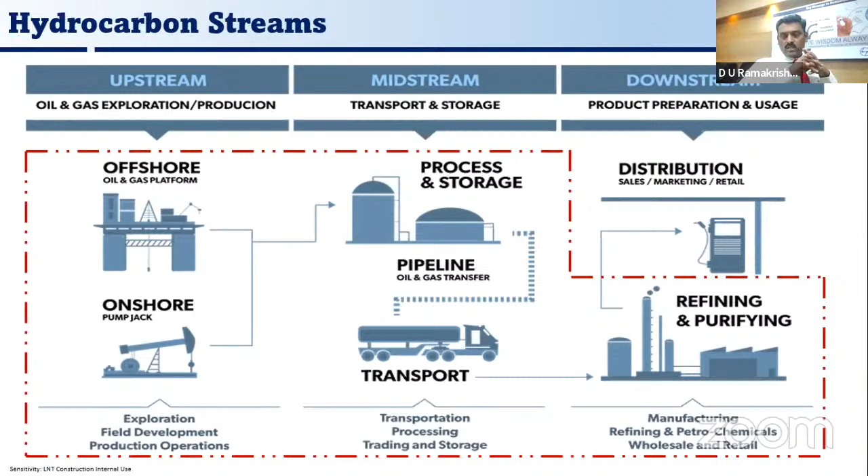If you see the Indian hydrocarbon sector, it is one of India's 8 core businesses. Hydrocarbon is following, and we are the third largest consumer of crude oil, with consumption of around 204 million metric tons per annum. We are also the 4th largest - India has refining capacity of 251 million metric tons per annum through 23 refineries, covered through public, private, and joint ventures. The main point to note here is that we are the 4th largest LNG importer.

In the next 5 years, we are going to invest around 7.5 trillion rupees in the oil and gas sector. The refining capacity of India, if you see it in 1998, was 62. Right now we are landing up to 251 MMT, that is million metric tons per annum. In the last 20 years, our refining capacity has increased by 125%, from 112 to 251.

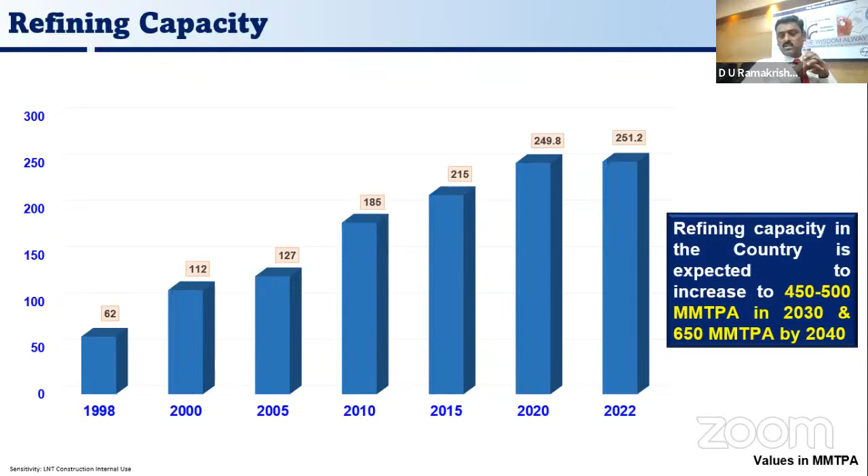The most important point to note is that the next 10 years, what we are going to do is what we did in the last 20 years - that's what we are going to do in the next 10 years. This clearly shows the largest volume we are going to handle in the hydrocarbon sector, and how many projects are going to come.

The main challenges in this field: one is the volume. Another is that customers nowadays are asking for reduced project cycle time - they want their return on investment as early as possible. The third is high competitiveness. Around 5 years ago, only 3 or 4 major contractors existed in hydrocarbon, but now multiple contractors, including foreign contractors, are coming into India and doing the job - it's highly competitive. Apart from all this, we are facing a scarcity of highly skilled technicians. These are the challenges in hydrocarbon.

With all these challenges, how we are going to ensure a qualitative product in the Indian industry is the main thing we are going to discuss now.

The key success factor lies on two parts: first, the process quality, and second, the product quality. If the process is in place and well established, automatically your finished product will come as per the requirements.

When it comes to process quality, it is very essential for an organization to have a strong, dynamic and robust quality management system. It means there should be a strong vision, mission, and a true quality policy stating what our requirements are in order to achieve our target.

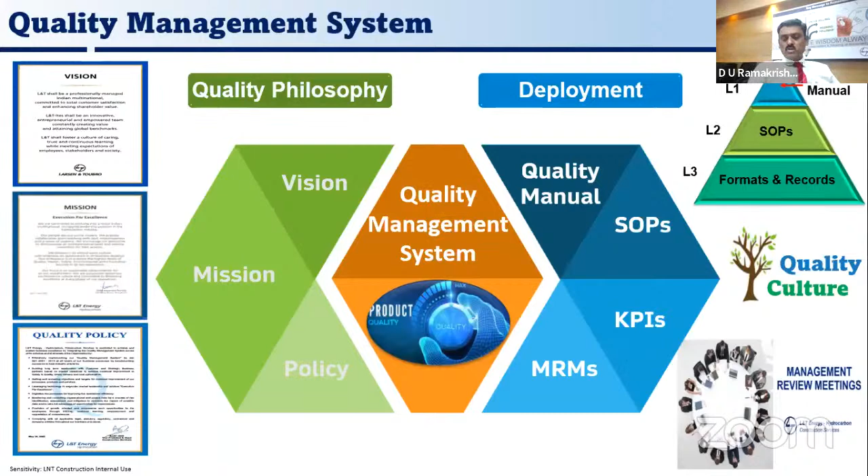As Mr. Pradhan mentioned earlier, in any project, since it is an EPC - engineering, procurement, and finally construction - there should be strong detailed engineering.

We should have a strong understanding of the customer specification. Even though I've shown the various processes involved in design, I'm going to specifically talk about 3 phases that form the qualitative design. Quality doesn't only lie with the end product - it should be present at the design stage also. The first point is we should have a very clear understanding of customer specifications.

We should not go by default. Some projects we have done earlier, and when we do a similar next project, it doesn't mean the earlier specification can simply be copied. We should understand that it varies depending upon the licensor.

The second thing is interface engineering, which refers to engineering, procurement, and construction. There should be strong project feasibility studies and constructability review.

Sometimes design people sit inside the office and design with respect to specification, codes, standards and statutory requirements. But practically it may not be possible to procure that particular item, or construction may not be in a position to build as per their design. This leads to issues by the end of the project, or there may be some compromise on quality.

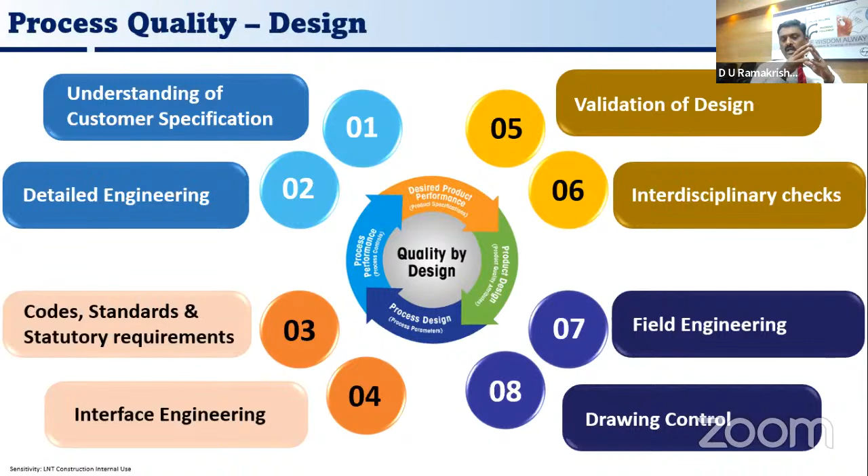In some projects, the revised drawing could have been made in the month of May, but the end user will still use the superseded drawing. So there should be a strong drawing control. It needs to be ensured that as and when the revised drawing has been made, it is properly communicated to the end user. These are the main points to be taken care of at the design stage.

When it comes to the second part of process quality, meaning procurement, we should have strong vendor management, evaluating the capabilities of the vendor. We should not go based on L1.

We should have a strong evaluation system where the capabilities of the vendors, with respect to financial capabilities, resources, whether we can meet the delivery schedule, what type of quality requirements are needed, and whether the vendor has proper resources in terms of machinery and materials, are evaluated. This needs to be evaluated periodically, not on a one-time basis.

The second thrust in procurement is that any material request made by design should be validated by quality before placing the order itself, to ensure all quality requirements of the specifications are put forth before the order is placed with the vendor. Otherwise, ambiguities may arise at a later stage, which will cost not only quality but also the progress schedule.

When it comes to order management, we are well versed with the quality assurance plan, and periodic inspections are carried out with competent third-party inspectors. But here I'd like to make two points. Normally the mistake that happens is people think that once stage inspections are made, the finished products are okay as per relevant testing.

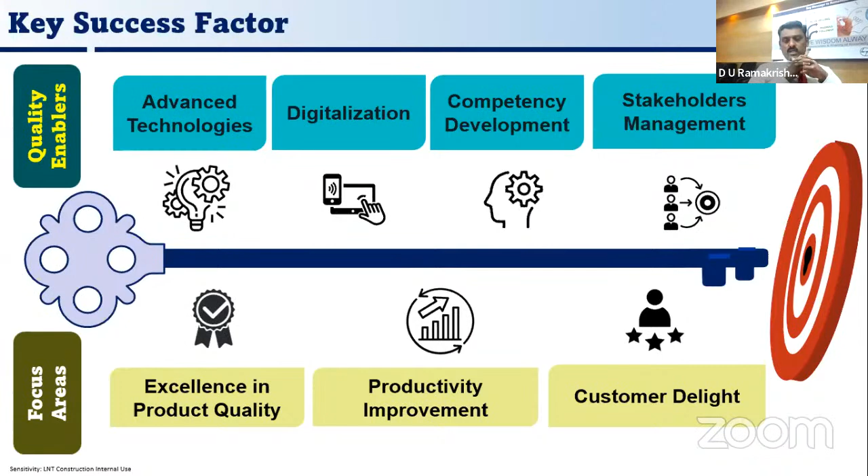Now let me talk about product quality. In the next 10 years we are going to handle a huge volume of projects, and cycle time is getting reduced. Unless we focus on quality enablers - advanced technologies, digitalization, competency development, and stakeholders - these are the 4 areas we have to give more focus to, so as to get excellence in product quality, improve our productivity, and ultimately achieve customer delight.

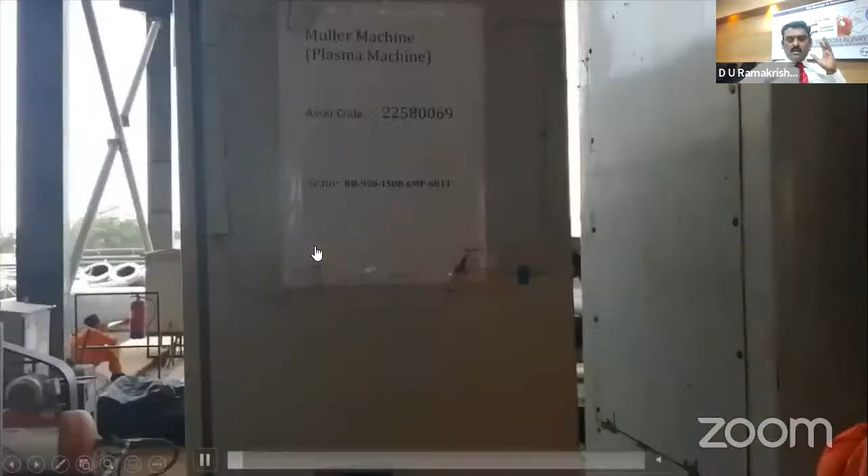Now, a few of the technologies available in the market which are essential for the growth of the hydrocarbon sector, I'm going to discuss here with some videos. When it comes to cutting operations, CNC cutting machines are available in the market. In the conventional process, we normally used gas cutting followed by grinding carried out with a grinder.

CNC machines are being made available where cutting and beveling will be simultaneously carried out. The productivity of these machines can achieve around 400 inches as compared to the conventional manual process, which gets around 60 inches. So you can see it is almost 7 to 8 times higher productivity.

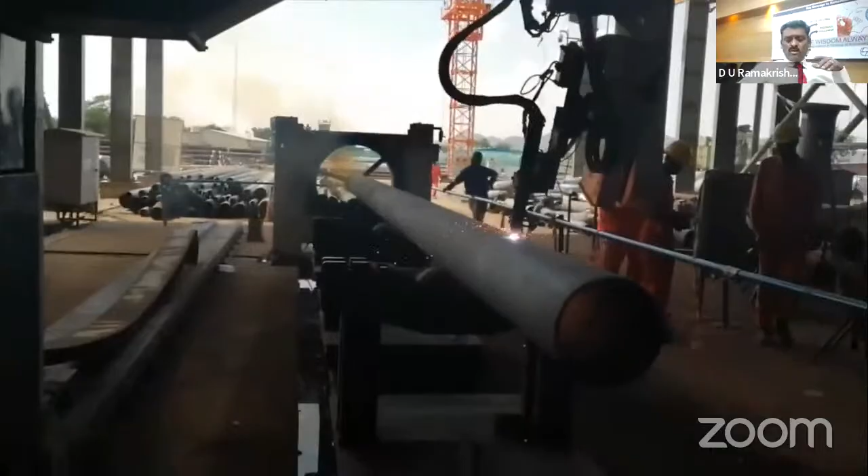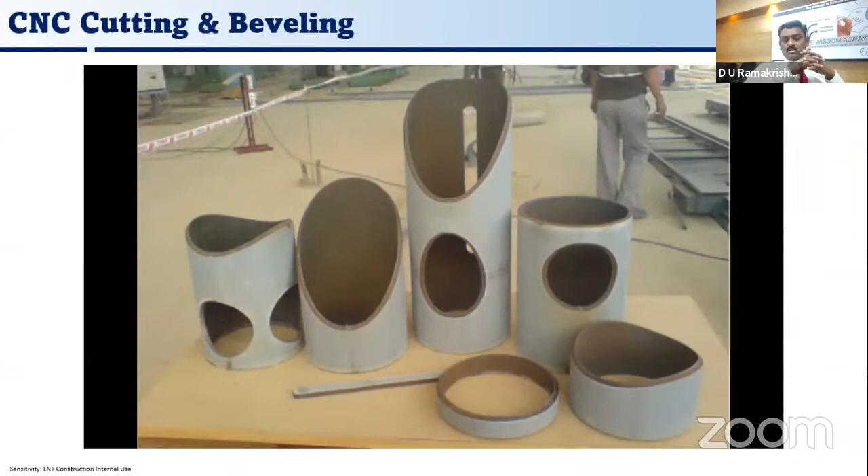But at the same time, what I want to say is consistent quality. You can get different types of profile cuttings with high level of surface finish, which is very essential for high quality welds.

Similarly, when it comes to small bore pipes, normally people think big sizes, big bores are very cumbersome. No, it's not like that. The small bores are the very painful areas as far as hydrocarbon is concerned. So here also, handy tools are made available for doing this beveling machine.

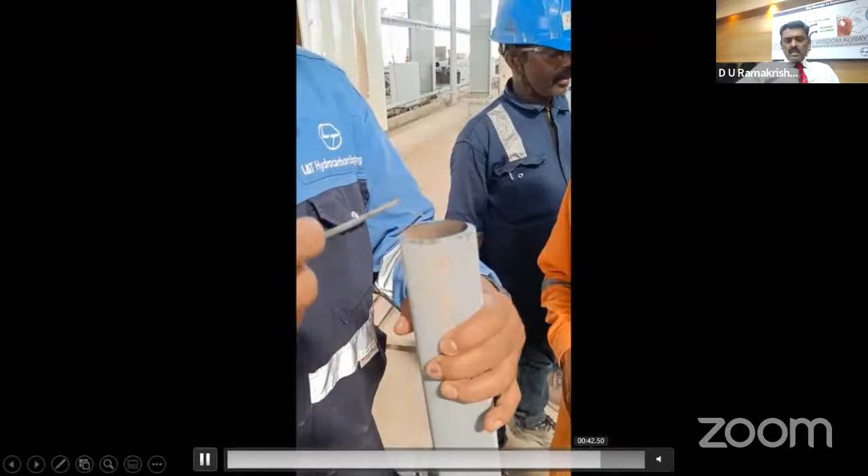In the earlier case, the machine is fixed and the job is transferred. But here, the handy tools weigh only 7 to 8 kilograms, where the job will be fixed, but the machine can be transferred from one location to another. This yields almost 50 to 60 times higher productivity with very high finish. You can see the shiny finish, which we can never achieve in manual processes.

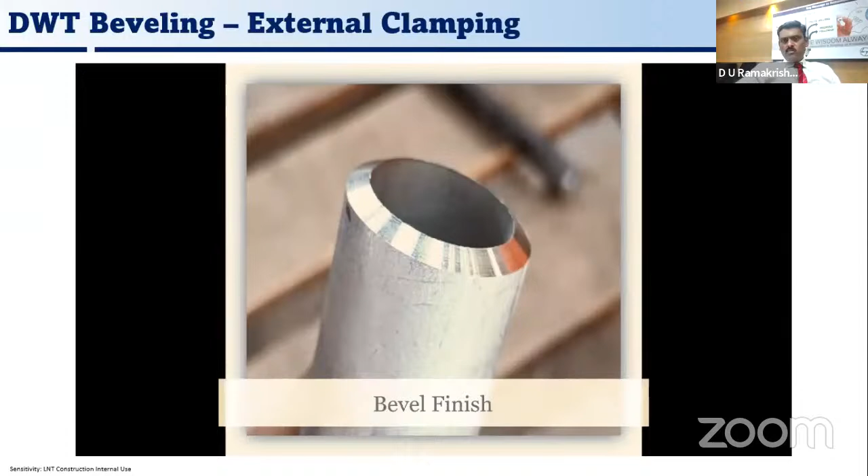The second important activity in the hydrocarbon sector is welding. Generally for welding we used to see shielded metal arc welding or gas tungsten arc welding, but now these have become obsolete.

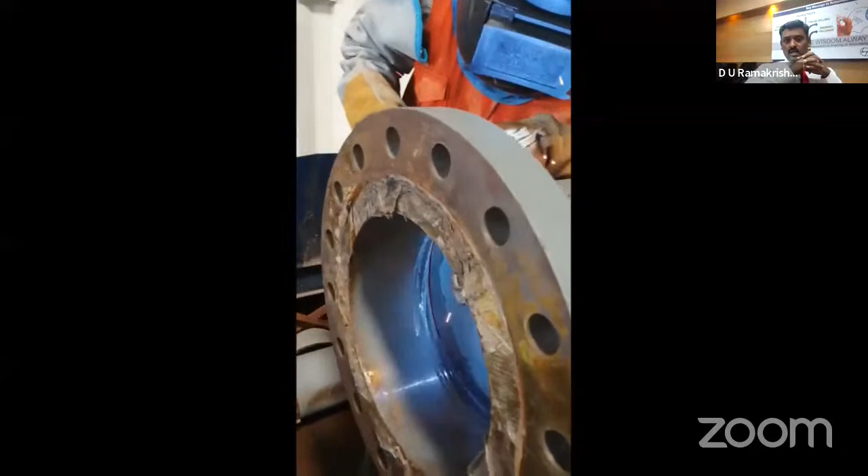Now in their place, flux core arc welding or the RMD process - RMD meaning regulated metal deposition - is available in the market in place of stick welding, where the productivity is coming to almost 120 inch dia per welder man day, as compared to conventional arc welding where the welder used to deliver around 40 to 50 inch dia alone.

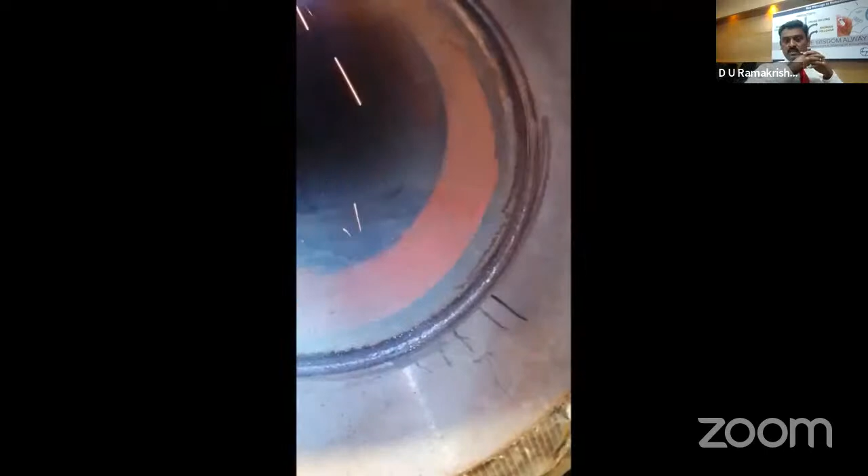And here, not only is productivity increased, but also the quality of the weld. You can see the quality of the weld is also increased here, with high resolution.

It's getting jammed, the video. Sorry, just a minute. My video is getting jammed.

Am I audible? Yes, we can hear you, you are audible and you can proceed with the slides. I think you gave the message very clearly on the automatic. Actually, it is. We saw the video, we saw it very clearly. Now actually what happened is my PowerPoint presentation is getting jammed. Just a minute, you can exit and reproject it. Okay. Sorry. You can share it again, perhaps. Yeah.

So similarly, I mean, when it comes to this. Yeah, you can - you have to share the slide. Oh, share the screen, a minute. Yeah. Sorry. Sure. Yeah, we can see that now.

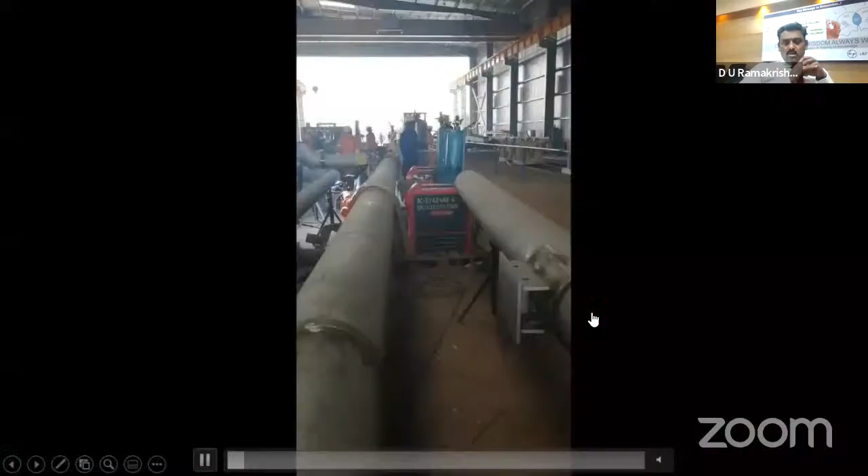Okay, sorry. So similarly, orbital weldings, automatic weldings are being made available in the market, and here the process itself is getting changed. It is a flux core arc welding process being used in place of shielded metal arc welding.

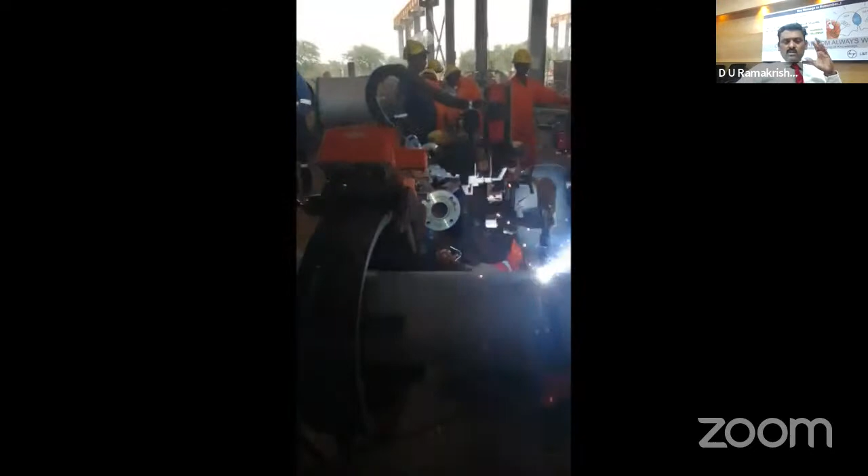The human involvement is being avoided, and it is completely operated by the operator through remote control, where the welder can deposit around 12 kilograms per 10 hours of welder man hours, as compared to the conventional process where they can deposit only around 4 to 5 kg.

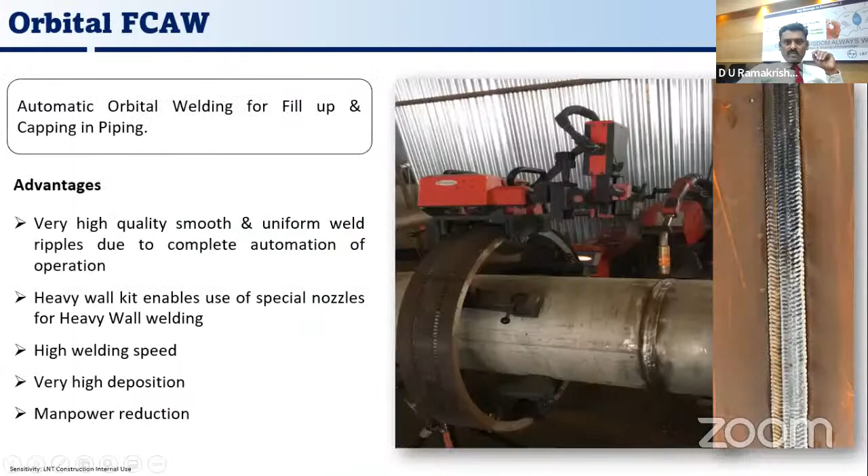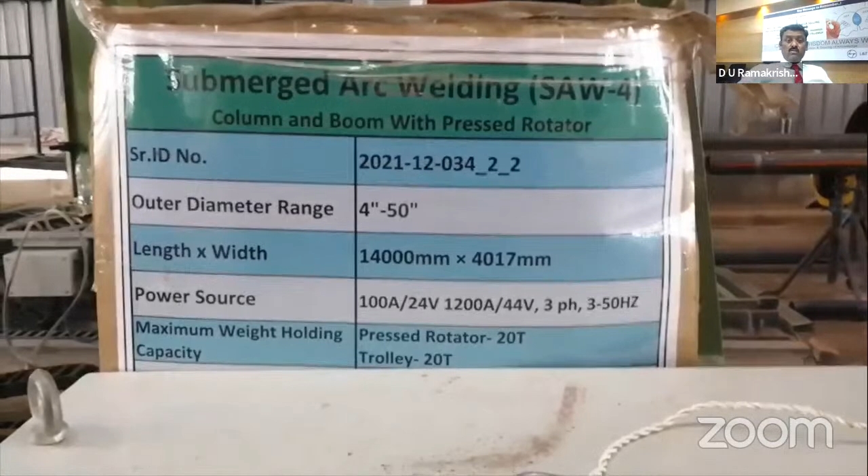Similarly, the other process available is for when in hydrocarbon projects the thickness of pipes or big bores goes up to 100 mm or 120 mm thick. In those cases, the submerged arc welding process is put into practice, where welders can deposit up to 40 to 45 kilograms per welder man, which is almost 10 times the equivalent of the conventional welding process, with a high level of quality.

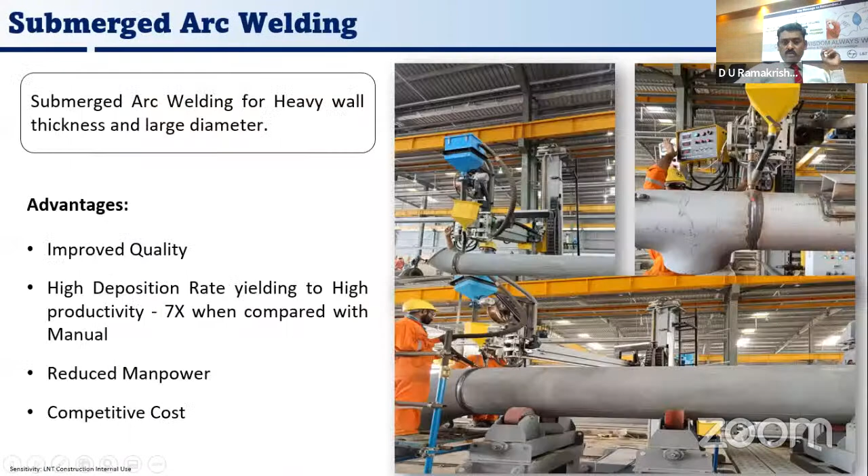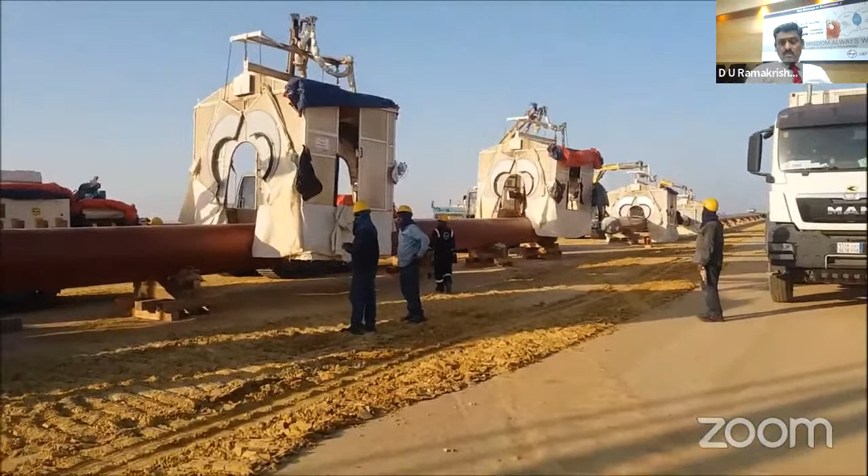So these are all the processes available for piping. Similarly, I talked about the midstream, where cross-country pipelines are employed from one area to another to transport crude oil. Some cross-country pipelines run for 600 kilometers, through deserts and through forests. There also, automatic welding is employed with the help of various types of machines - PWT, Fronius, Magnatech.

That type of manufacturers are available, where we can able to get this high level of finish with consistent quality. Main thing is the consistent quality along with high productivity.

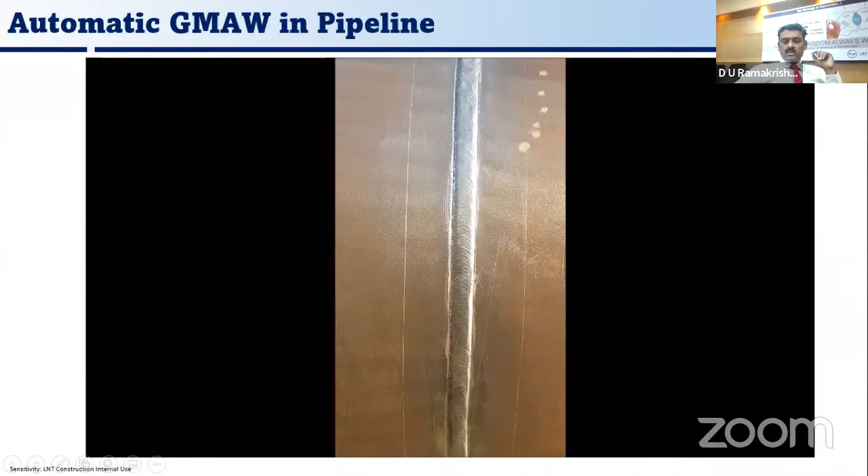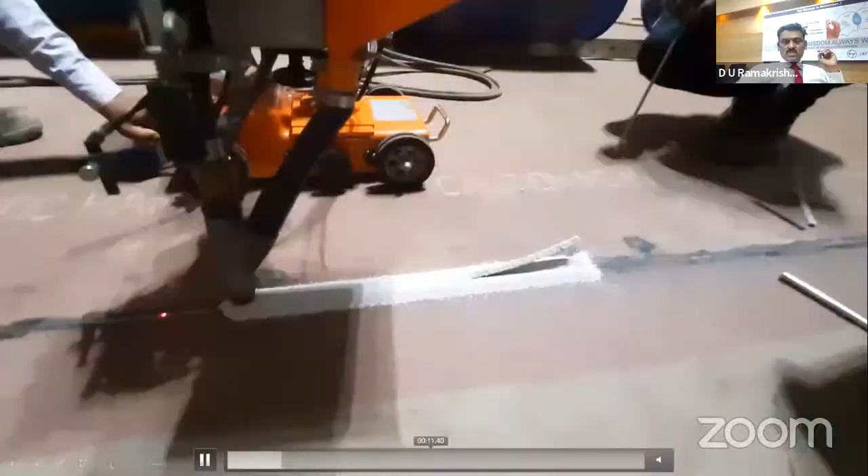Similarly, in tankage, this is also in the hydrocarbon sector. Particularly, I talked about LNG, that we are the 4th largest importer, so a lot of LNG projects are coming in the market. For this tankage construction, again, the same submerged arc welding process is being employed. However, the machines are getting changed to suit the geometry of the jobs, whereas earlier it was for piping, now it is for tankage. You can see what type of finish with one single run we can able to get, a very high level of finish.

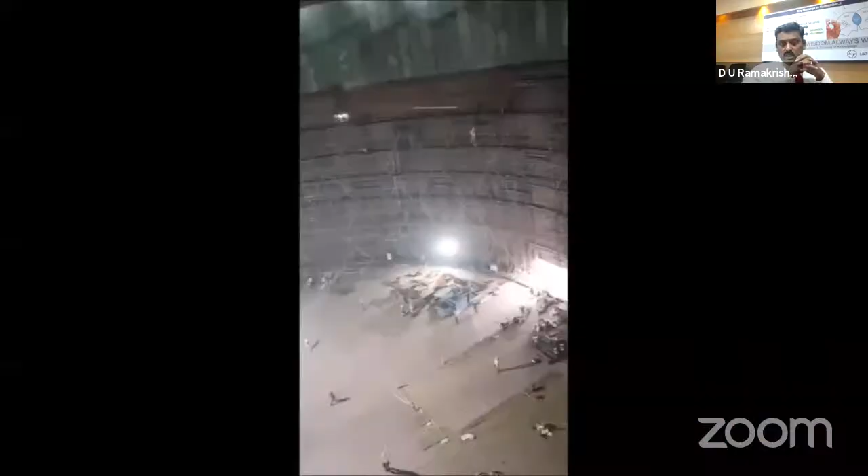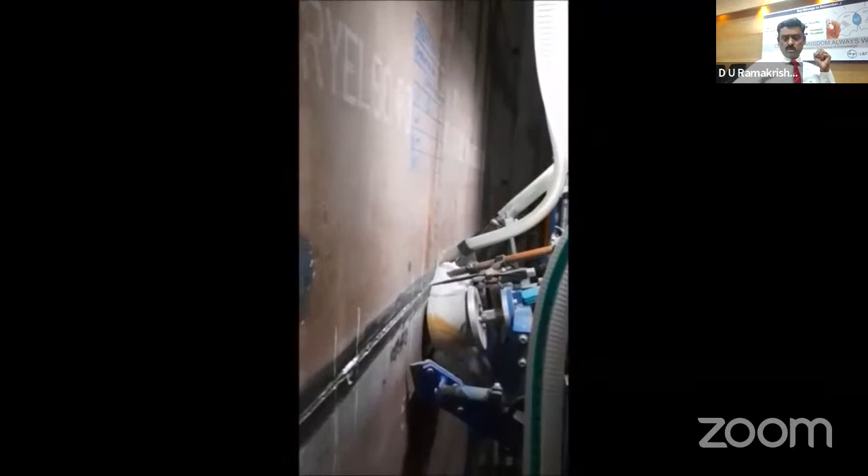And tandem submerged arc welding for this 9% nickel. This tank is 90-meter diameter, looking almost like a cricket ground. It is a 90-meter diameter tank of 30-meter height with a double wall storage tank, storing LNG gas at -196 degrees centigrade, which is cryogenic, where a high level of quality is imparted through the nickel welding. It's not carbon steel welding.

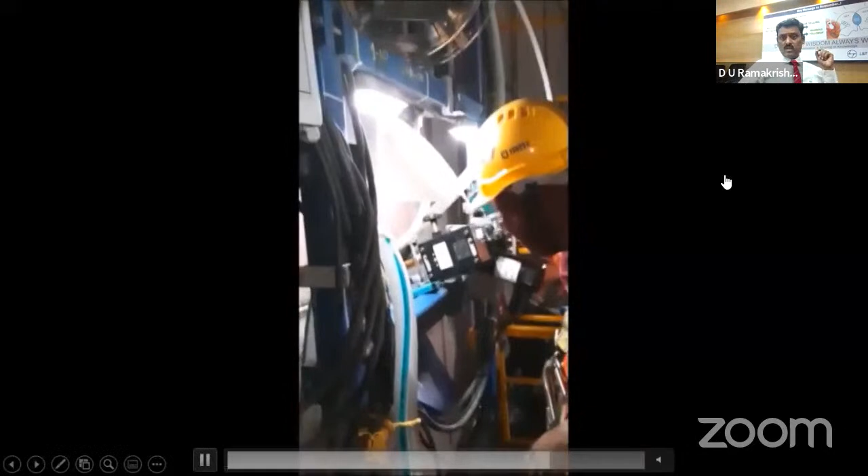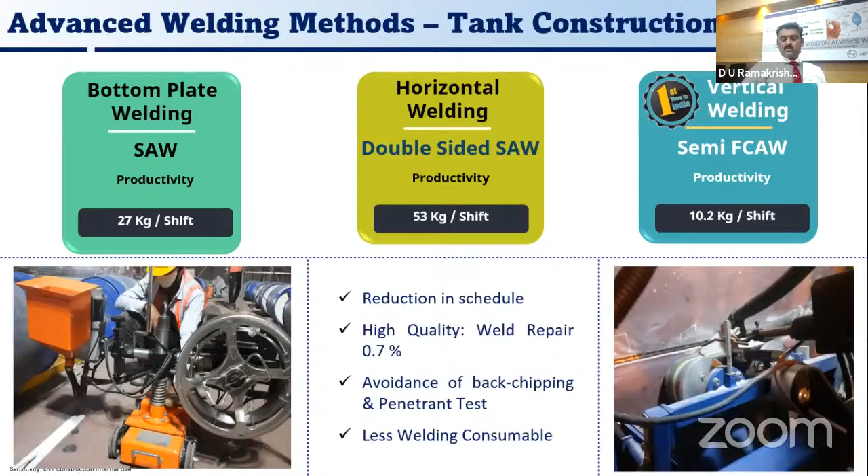So there, this double tandem submerged arc welding process doing welding simultaneously from inside and outside is made available. It is not only yielding high productivity, but also using very high level of quality 9% nickel weld. And I proudly say that with this process, even though the customer's target was that the weld repair should be less than 5%, the actual repair percentage achieved was 0.7. So this is what I want to say, in the sense, the customer delight.

So right now we talked about cutting and welding, but however, in any hydrocarbon project, until and unless the non-destructive testing is not carried out, the project will not be completed. So when it comes to NDT, radiography and ultrasonic testing are the two prominent entities being used.

And here also in this radiography, digital radiography is being put in place. It is simply like the X-rays we do in medical. In earlier days, the patient used to go for the X-ray, then the film is developed, he has to wait for 3-4 hours. But right now, he will go to the X-ray room, and by the time he goes into the doctor's room, that image will already be with the doctor. The same technology is being applied here.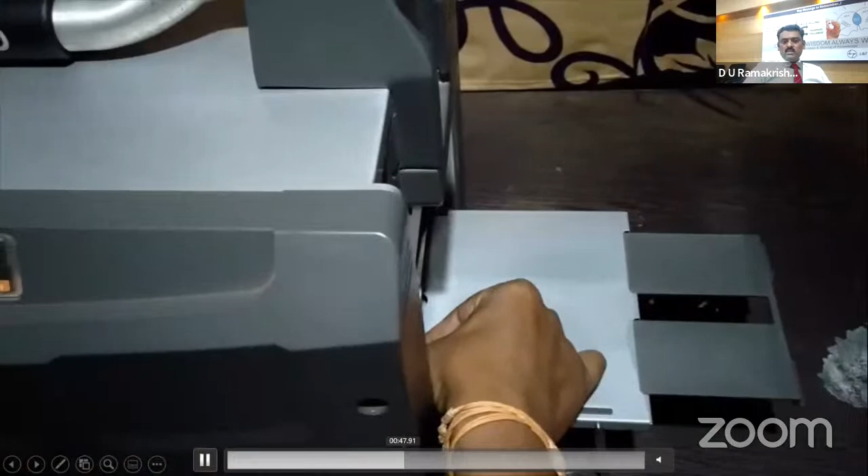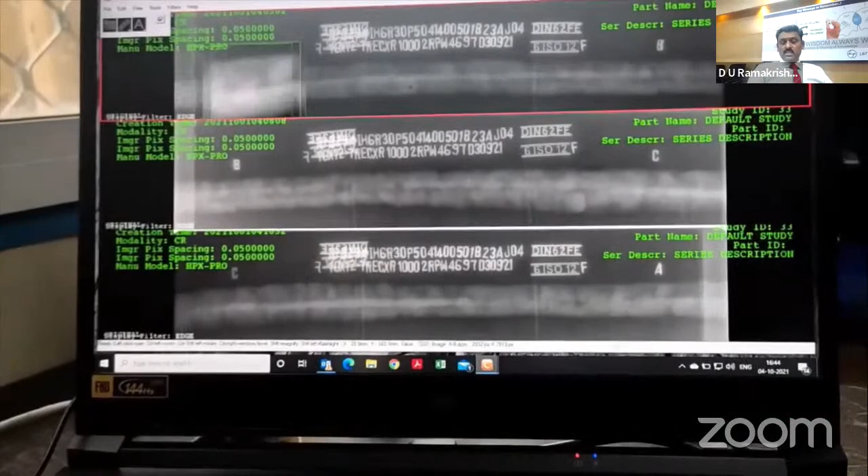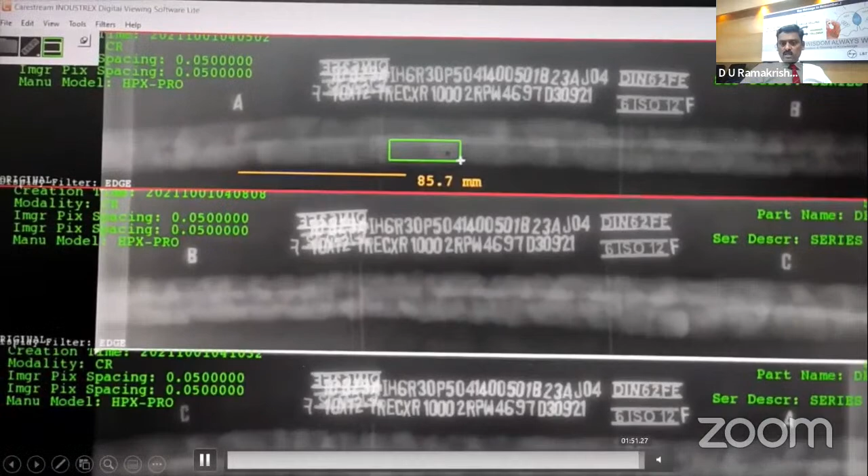So here, instead of films, image processing plates will be used. After the exposure, this image processing plate will be fed inside the scanner, and we can able to get the digital image. So here, not only the productivity or the high sensitivity, but it is eco-friendly, where there is no need to go for chemical fixing or developing, hazardous liquids are not being used. There is no need for disposing of chemicals, which itself is not eco-friendly, but here all these problems are avoided, and it is also eco-friendly. The digital radiography is being available in market, which is being employed by L&T.

And the other one is ultrasonic testing. In this ultrasonic testing, the latest technology, phased array ultrasonic testing, is available. Normally in radiography, what happens today is, if you are doing the joint at night only, radiography is permitted because of its radiation hazard. The next day, the film will be developed, and by second half or the third day, it will be interpreted. So we have to wait almost 48 hours to verify the integrity of the welds.

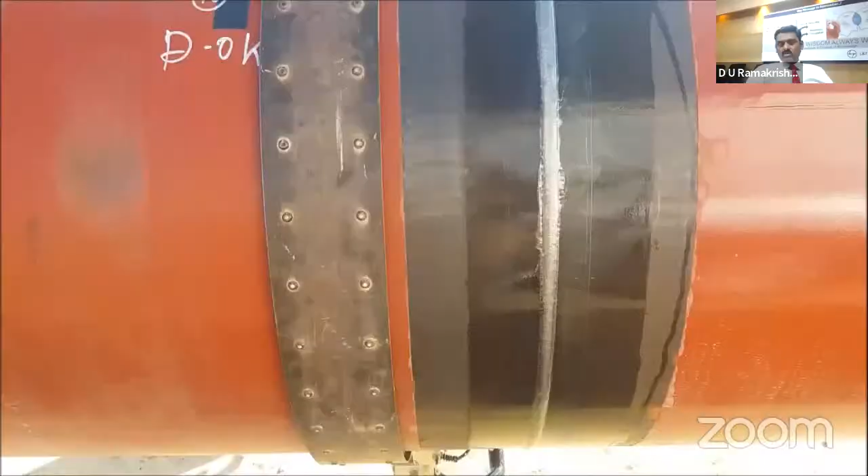Whereas in ultrasonic testing, once the welding is completed, for 1 hour we have to wait till it gets cooled, the temperature has to reach 60 degrees. Once it reaches, the scanning will be carried out by this ultrasonic machine, and we can get real-time results. Nearby, the interpreter will be available within the vehicle, and he can verify the integrity of the weld online. Within 1 hour, we can say whether the weld is okay or not okay, and subsequently it can be released for the further process. So it is having a very huge impact on project completion without compromising on quality.

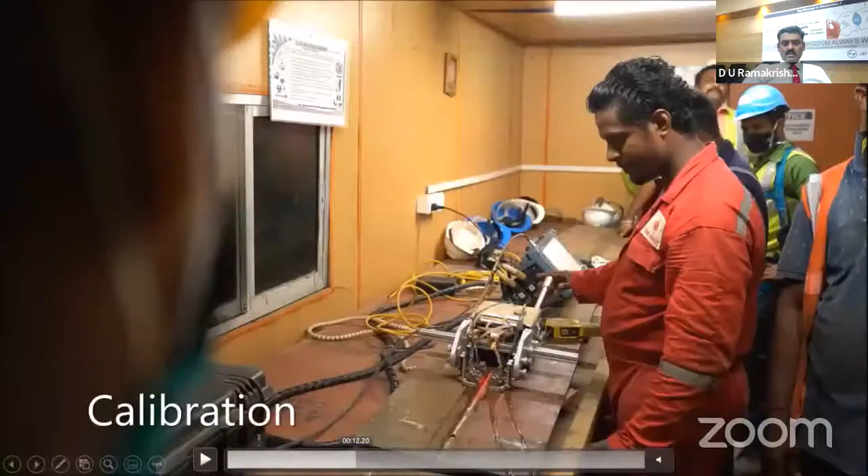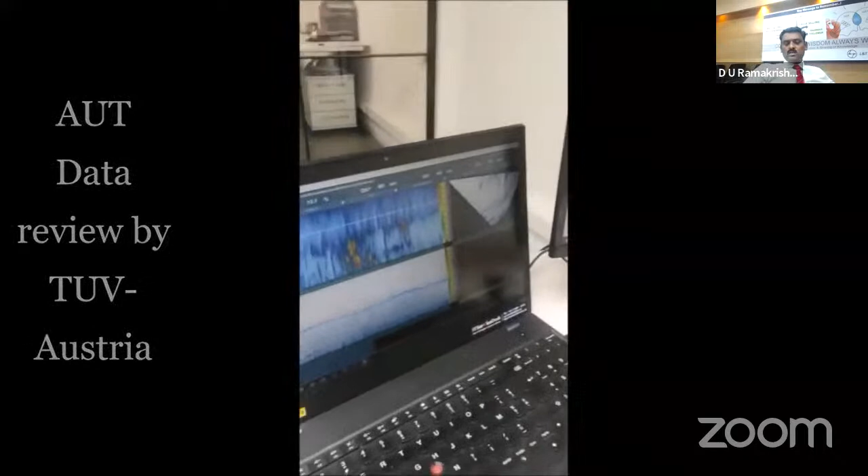The same thing is also for nickel tanks. For nickel tanks, live automatic ultrasonic testing is carried out for the big diameter tanks, where the interpreter can sit inside the office room, and the results will automatically come to his place, and we can release it for the subsequent shell course erections.

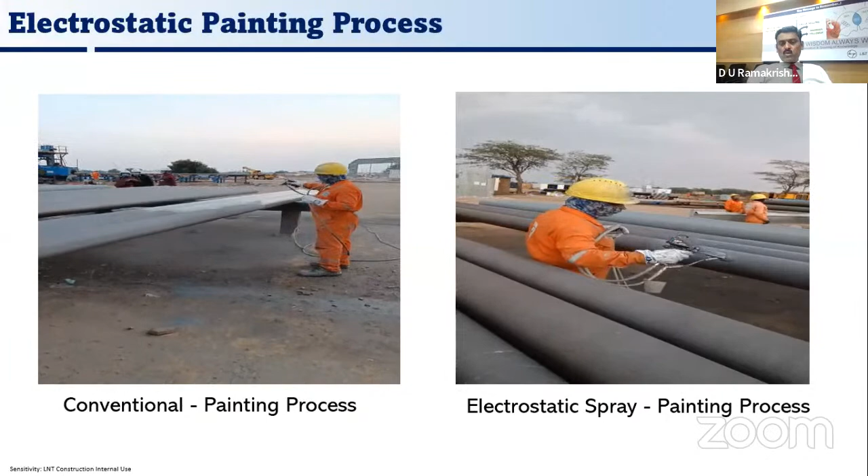Similarly for painting, electrostatic painting is now available. If you see the comparison, the conventional spray on the left side shows huge loss, which is a waste of the nation's money. Whereas on the right side, electrostatic painting not only reduces wastage but also improves productivity, and gives a high quality finish. This is available in the market and being implemented by L&T.

When it comes to the civil part, the latest technology is robotic painting, which is being used for all control room buildings and refineries. Instead of manual painting, we can go with robotic painting. Consistency is the main benefit here, not just productivity.

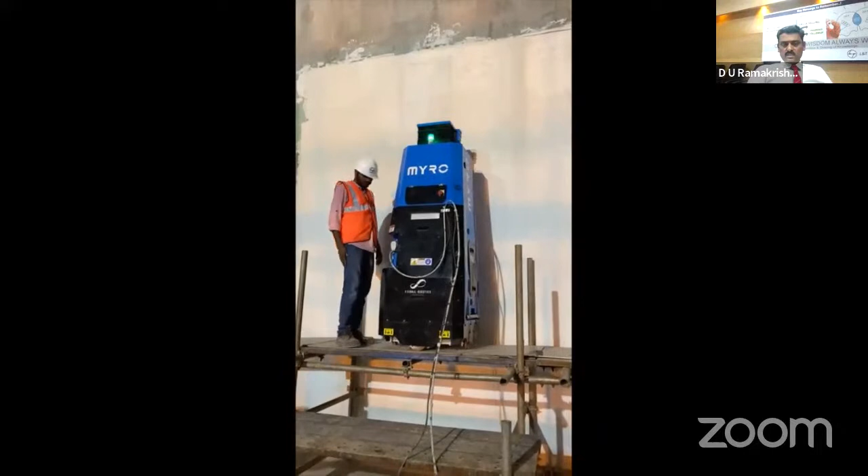Wherever labor or workmen are involved, fatigue is a factor. We don't get consistent quality between the start of the day and the finishing stage. But since a machine is involved, we get consistent quality throughout the entire project.

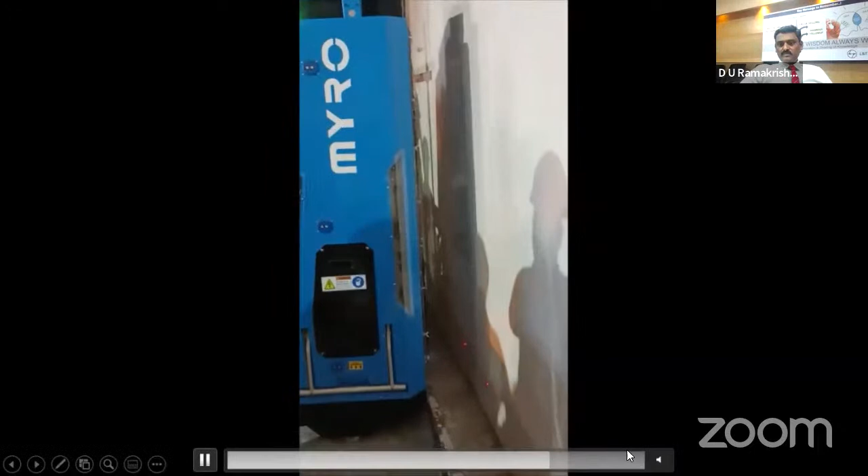This is plastering. Normally in our houses or any building, we see a plaster mason come and mix it manually. But here, an automatic plastering machine is available, where they just feed material into the tub, and in one stroke, covering a width of around 1 meter, plastering is carried out through this auto plastering machine. You can see the finish. The customer is really delighted, and the durability of the product is also increased with this automation process.

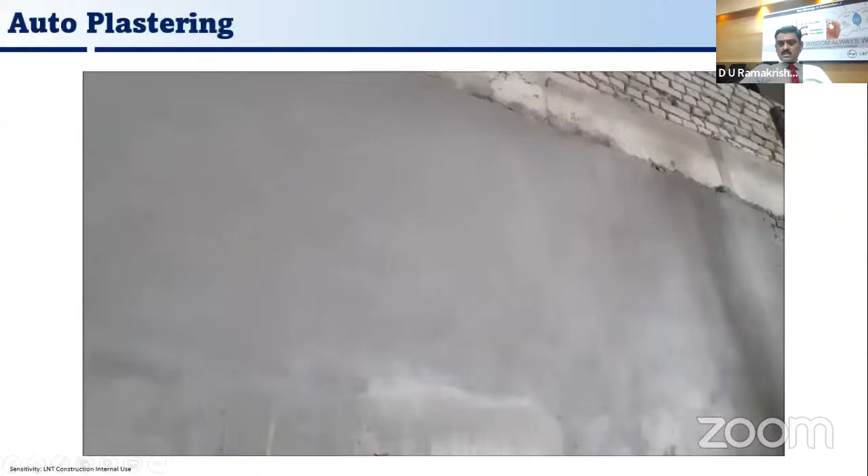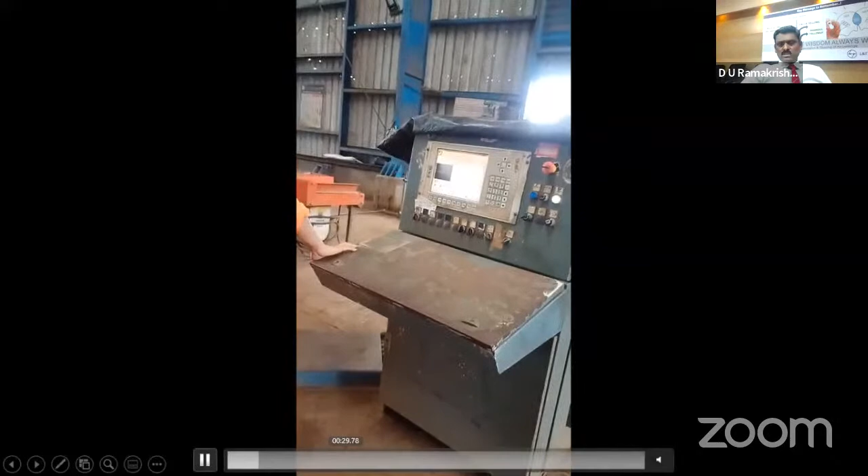In civil work, similarly, rebar cutting and bending now uses CNC machines. We just feed the drawing inputs - what is the length of the rod we need to cut, what is the diameter, and what is the bending radius. Then the machine automatically takes care of it and bends as per the respective dimensions, giving us a high finished product with these rebar gauges.

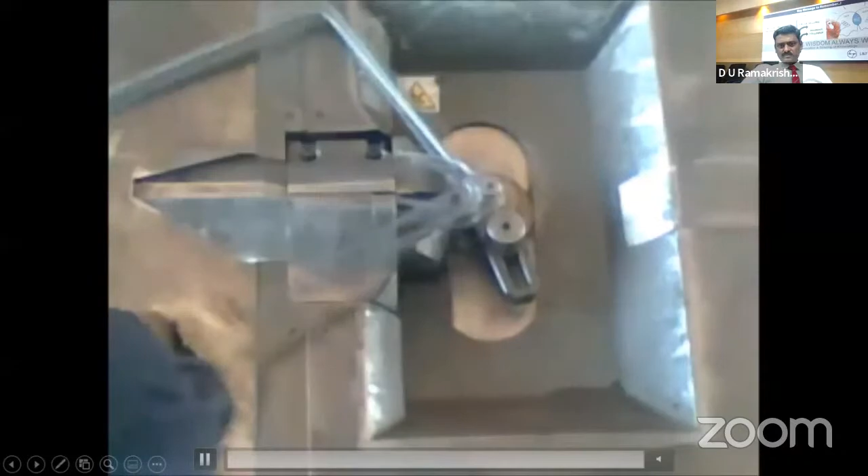So now that we've discussed available technology, it's also essential to measure the level of quality. For radiography, we normally have radiography repair levels - how many joints need repair, how much needs to be radiographed. But when it comes to civil and electrical work, there's always subjectivity - one person may see a job as good, while another person's expectations may be something different.

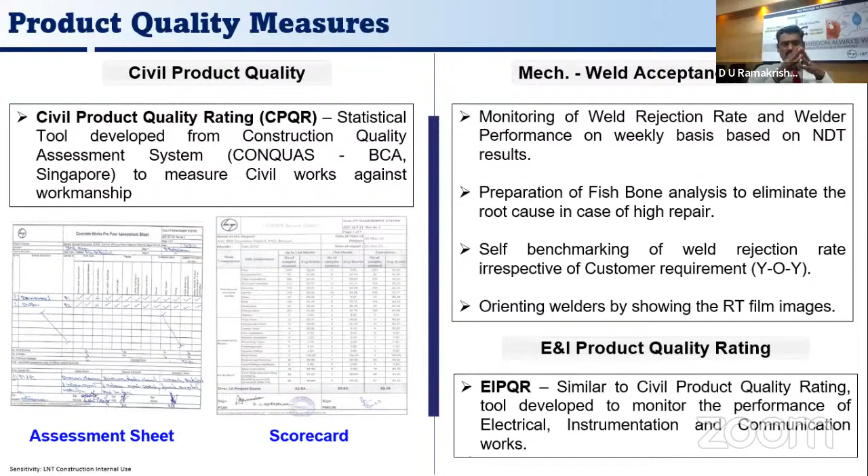To avoid that subjectivity, a statistical tool called Civil Product Quality Rating, CPQR, or EIPQR - Electrical and Instrumentation Product Quality Rating - is available, designed based on the Singaporean model called the Construction Quality Assessment System, CONQUAS. Based on that, without any subjectivity, a score sheet is made with proper sampling plans. This is not inspection, it's assessment. The concept is doing it right the first time itself, so we can measure how much rework is avoided with these tools.

Apart from product quality, process quality also needs to be measured. So the Project Quality Index is available, where the quality of engineering, procurement, and construction is measured, so we can find out the overall project quality score. We can also identify, if the project quality score comes down, which area is contributing - engineering, procurement, or construction - so that particular area can be focused on to improve project quality levels.

Digitalization is very eminent right now - without it, we cannot succeed in the market. Since welding is the core area in hydrocarbon business, maintaining weld history is very essential. In earlier days, with the conventional process, we used to manually enter what stage fit-up, welding, or NDT had been completed. Now the E-Alps, the Activity Level Planning System, has come, where this has to be entered on a day-to-day basis.

At the end of this project, when we want to have the history sheet, the system will automatically give the complete history for the last 2 years, if the project is running for 2 years in this environment, since startup up to the end, the complete history will be made. Similarly, audits are also being made available online.

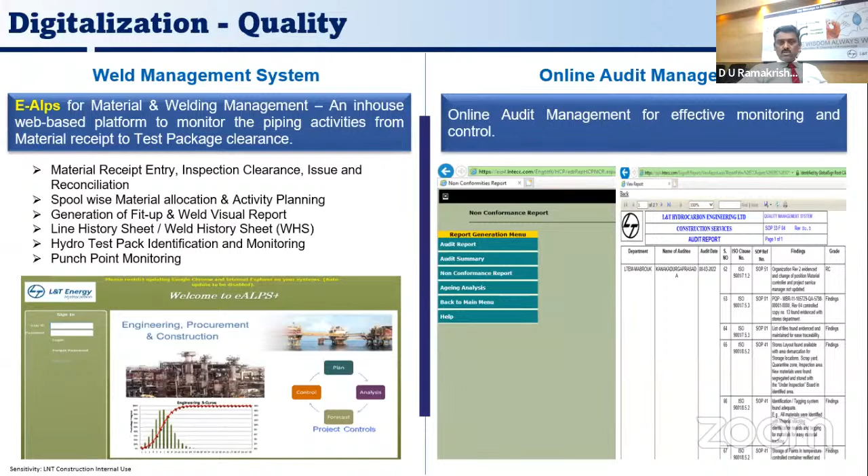Mainly these 2 points I would like to say here. One is this WPS Digilog, we are calling. In any project, the welding procedure specification is a must. The projects may be running one in Vizag or one in Panipat. The same type of procedures will be required in both projects, but it is unknown whether it is available in this project or not.

And they used to go for duplication. With this digital module, anybody can go inside and find out whether the WPS is available or not. If it's available, they can trace it out through this module, and they can avoid the duplication, because there are some procedures which may take nearly 40 to 45 days of time to develop. Until then, the welding cannot be started. So this type of duplication can be completely avoided with this digital tool.

And scarcity of technicians, I already pointed out as the main challenge. In construction, hydrocarbon, welders are the key technicians, and carrying forward a welder from one project to another once a project is completed is becoming a big challenge for us. So here this live data bank will be made available, where the complete history of the welder, including what all projects he has worked on, what type of materials he has welded, what is his repair level statistics, how is his behavior, what is his productivity - all data will be available in this data bank.

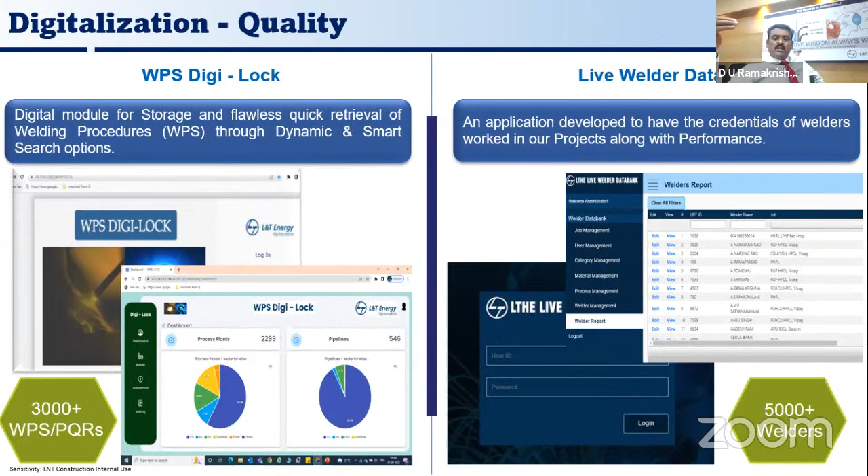And when the next project comes, if I want an alloy steel or a stainless steel welder for this particular project, we can go to this data bank and filter it out, and we can call the welder in a short period of time, so that the good welder can be deployed quickly in order to meet the project completion schedule.

And of course, we talked about technology and digitalization, but creating a quality culture is very, very eminent. If technology is available, digitalization is available, but the person who is going to operate the technology or the digital tool does not have the competency, then it is a problem.

So there is always a need for continual professional development. They have to upgrade themselves to attend courses for welding engineers - IWE, International Welding Engineer certifications - then American Society for Non-Destructive Testing, the level 2 and level 3 courses, welding inspection courses, because it is always necessary to update themselves with the latest technologies. So persons have to be continually sponsored to attend all these courses, so as to upgrade themselves to utilize these technologies and digital processes effectively.

And of course, when it comes to this quality culture, it is essential to create awareness on the quality requirement for all stakeholders. It is not that only the technician or the inspector should be aware of it. For any project to succeed, all persons involved - whether workman, subcontractor, supervisors, or suppliers - they should be aware of all the quality requirements.

For that, quality month celebrations are held throughout the world - November is declared as quality month. In this particular month, various internal and external training programs are conducted to create awareness about quality for all stakeholders. Mainly competitions - a lot of competitions, technological quiz, essay competition, slogan competition, poster competition - where all workmen, including staff and their family members, also participate in this program, so that awareness is created for each and every one.

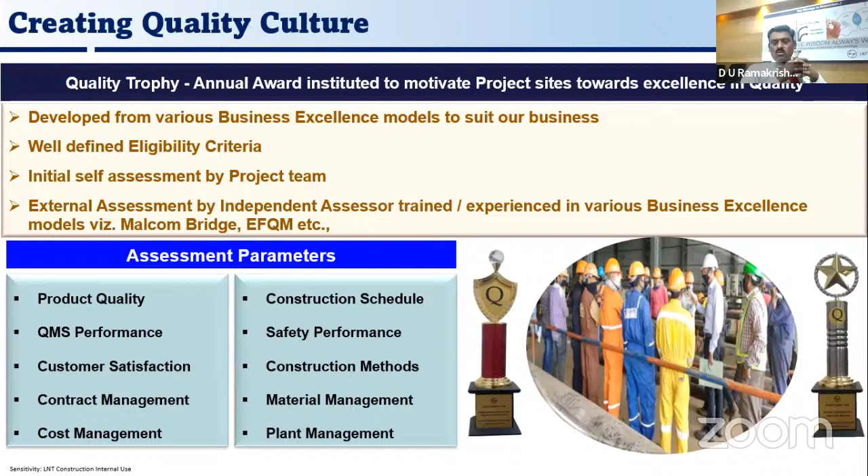And it is purely to motivate the project and to cascade the importance of quality to all stakeholders.

Of course, in order to do all this, the customer has to be satisfied. But what I want to say is that satisfaction needs to be changed to delight. Satisfaction means just meeting the customer's expectation, whereas delight means exceeding the expectation. So in today's business scenario, for business excellence, a delighted customer is the best business strategy for all.

So finally, I have to say thank you, but what I want to quote is, change is the only thing that does not change. Why I am putting this point here is, we have talked about the latest technologies and digitalization, but it is not enough. The world is improving fast, and a lot of technologies are coming in the market. We should equip ourselves to adapt to change. We should not end up with this technology alone. We should try to adapt whatever latest technologies are available in the market and put it into our regular job, so that we can sustain in the market.

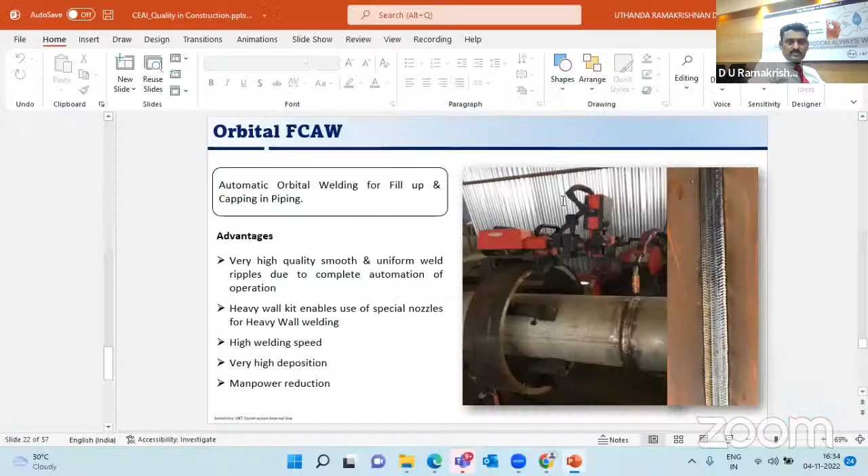Thank you. Thank you very much, Mr. Ramakrishnan. You brought in the insight of how to build quality in the organization.

Starting with process quality, product quality. For product quality, you need to have quality enablers like advanced technologies, digitalization, competency development, and stakeholder management. But the whole process of implementing that and taking it through the organization, training your people for quality, culture with the quality trophy, that is an amazing process that you implemented. Thank you very much, Mr. Ramakrishnan. Thank you, sir. Thank you.

After this, I would like to call the next speaker, Mr. M. Sathish Rao. Mr. Sathish Rao is the Vice President and Head, Project Management Consultancy Business Unit at Tata Consulting Engineers. As BU Head, Project Management Consultancy Business Unit, Mr. Rao leads a team of 1,400 plus engineers, building and delivering projects for clients in different sectors and across geographies.

At construction sites in India and all over the world. Some exciting new projects are the CIDCO Mass Housing, Shri Ram Temple at Ayodhya, Puri Program Management, power plants in Indonesia and Bangladesh, and the iconic Mumbai-Ahmedabad high-speed rail project. TCE provides services from concept to commissioning, depending on the scope of work, and monitors the delivery management for construction supervision, quality, and EHS requirements.

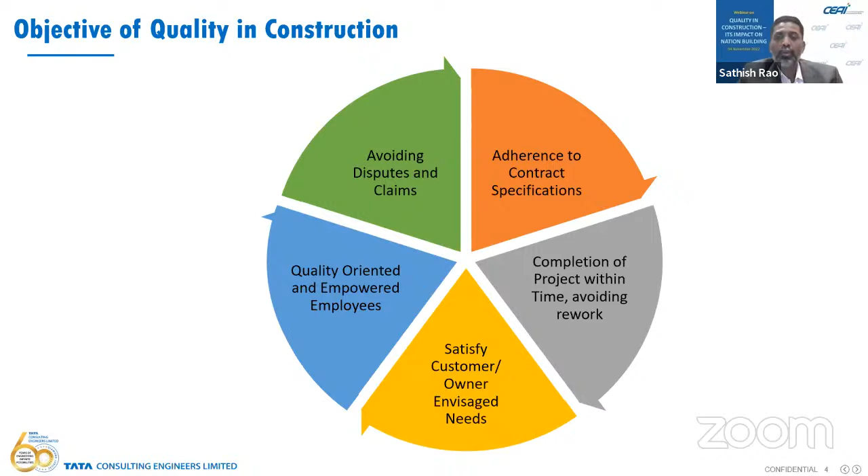Then we had Ramakrishnan speaking about training, development, motivation. Yes, quality-oriented and empowered employees is something that we should be looking at. And finally, avoiding disputes and claims. These do form a kind of baggage that all construction projects have, so we cannot shy away from this. But quality-oriented and empowered employees is something where a consultant or a supervising engineer from the contractor should focus on to get a better quality output for all of us.

This is a PAF model which talks about the failure cost, the prevention cost. This is an optimal cost model where we understand that the perfect quality model would have a very high cost on failure if we are not looking into a kind of focused delivery on quality. So more and more preventive costs that we invest in - Ramakrishnan actually showed so many things that L&T was doing to improvise on quality, improvise on systems, improvise on quality management systems and the various new technologies being brought in. I would bucket all this into prevention costs, which would aid into giving us more enhanced and improvised quality, going into higher durability and more customer satisfaction.

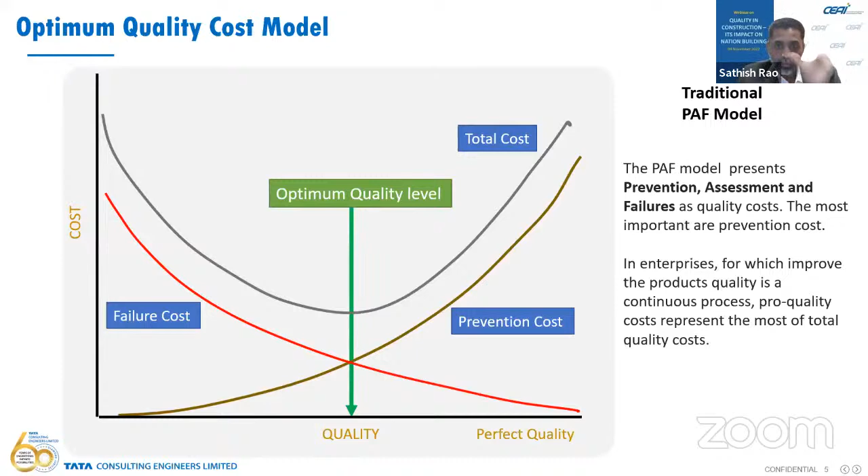Of course, getting into the delightful customer delight space. The quality assurance program, I think this should have a kind of exhaustive quality program. All stakeholders put together - the customer, the consultant, and the contractor - should actually draw up a very robust and exhaustive quality program. We have to have an effective procurement system where we source quality resources, quality material.

The material that are going to stand the test of time. We are going to train program - we invest money and time on training the workers, the engineers, the people who are going to ensure that the work is delivered. I think this is something that we have to have more and more focus on. And then, of course, reward more on quality, reward innovative ideas, reward better output. So I think as a quality assurance system, these four would constitute a very good program for all of us.

The elements I would look into - design. We have already spoken where the design has to be in line with what are stated and the implied needs, where we actually select material that have to be included. And then we constitute a kind of quality checklist or quality measurement systems that support us in delivering quality. So I think these aspects have to be looked into for us delivering a better quality product for the end user or the customer that we're talking about.

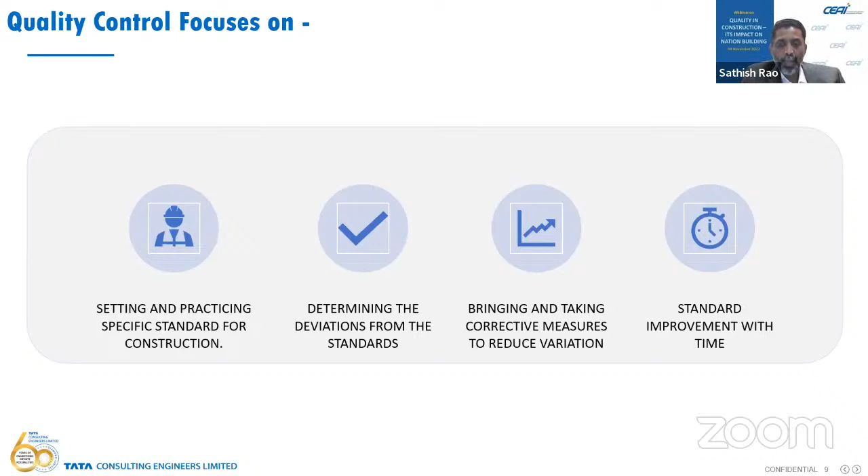We start looking into identifying corrective actions, and then improvise our system, bringing in more and more preventive actions, trying to ensure that the same kind of issues or problems do not recur in future. So I think these things, as far as the quality control system is there, with the quality assurance that we've already spoken about - these two constitute a kind of management system that would aid to a better kind of quality. Just give me some time, please, because I'm not able to see the whole screen here.

So we are talking about research that says on failed structures, 40% of the structures have failed during the construction stage. I'm sure that we all, the people who are involved in construction, be it from the consultant side or the contractor side, may have some kind of responsibility in trying to prevent this, in trying to avoid this. So this is something I think we should be focusing on, because there's a lot of cost involved in failures - that would immediately get into rework, get into a drain on the cash flows that the customer has, or the government has, or take it forward, that the nation has. So I think this is something - quality in construction - that is very, very important.

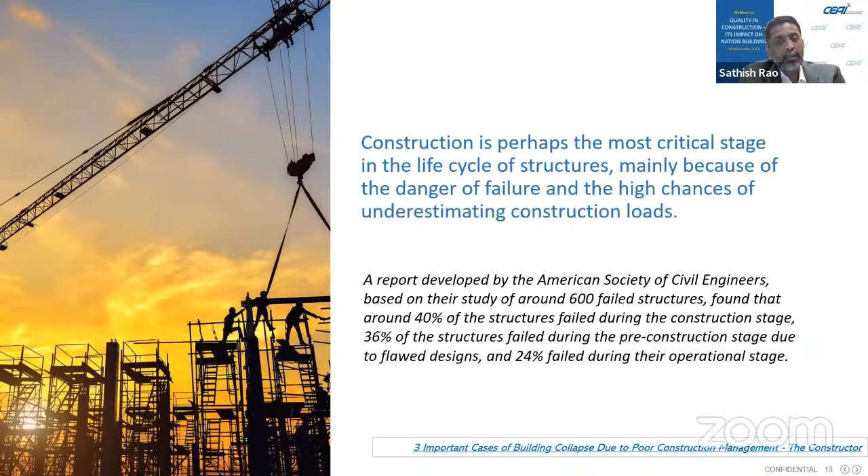All the stakeholders together, the focus from the customer, the efforts from the contractors, and the due diligence from the consultant together can support in trying to reduce the failures.

What are the top 10 factors that are affecting quality? One, we use damaged and low quality material. Yes, supplier and vendor failures.

We are talking about subcontractors who do not deliver in line with the work that we are giving out to them. Human factors that are there, failure to document changes, some changes that supersede drawings that are going to come in, or some practices that are not current, some last minute changes that happen from the customer or the situation on site.

Scope creep, miscommunication, complexity of design which might not be constructible, or we might not have done due diligence on the constructability of that. We are lacking in project management systems, and a kind of laxity on audits and testing, which constitute some of the major reasons affecting the overall quality management in construction.

Some facts on quality, from whatever research I have gone into, these come into a range of around 10 to 15% as rework cost. If you are looking into the kind of investment that a nation is doing on construction, and a rework cost of 10 to 15%, we can understand the drain on the monetary resources that we are facing.

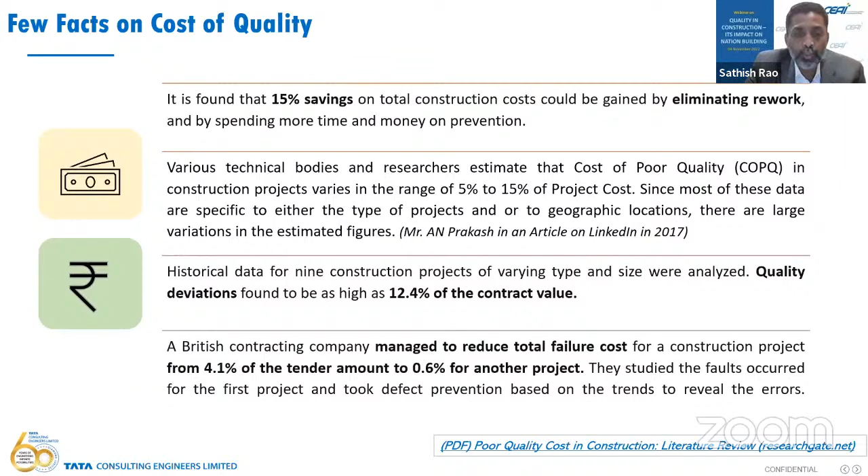This is not only a drain on construction, it's also a drain on the overheads of the contractor, where he then starts trying to subsidize these kinds of losses into more and more poor quality, thereby actually impacting the quality for all of us.

And what is the cost of poor quality? This is actually kind of a tip of the iceberg, where a very small part is seen above the water. What are these? Inspection, scrap - we are going to scrap the work that has been done, rework will come in, warranties will have to be there. We may have to reschedule, reprocess the whole system.

But then under the water, under the surface, there are many other reasons which are actually going to be a very strong reason for us to invest on good quality. There are going to be scheduling conflicts, whereby the rework is going to lead us to more and more design. We are going to lose on the monetary value of time. The morale would be lost. The customer confidence is lost.

There's going to be a lot of operational costs and byproduct losses, which I'll be speaking on in a couple of slides later. Then we might need to force upon expediting and having some parallel schedules coming in, trying to meet the customer end dates. We might have to forcibly get into buffering more and more inventory, getting a credibility impact, and loss in sales for future jobs.

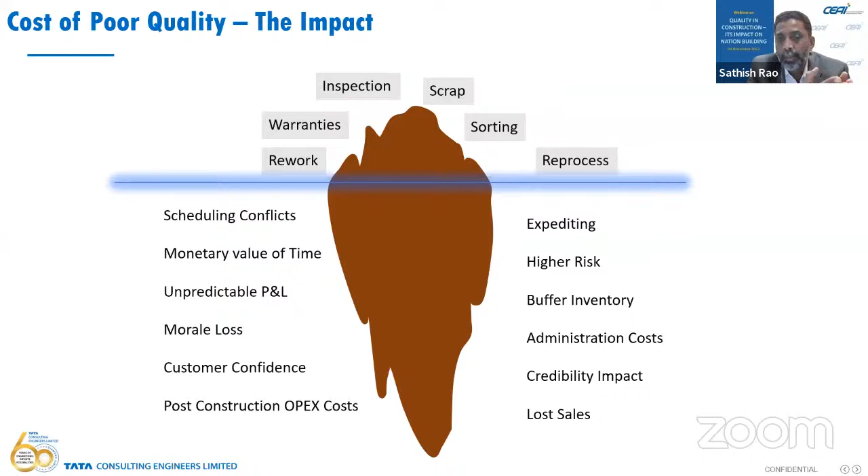So friends, if you see the above the waterline cost, it might not be as big as those that I have shown below the surface.

But this is coming from a kind of sampling from a construction company. But if you look at me coming from a kind of consultant firm, on a lighter note, I would say the first point, inadequate management support, would be the highest. Because whatever I have seen in my 28, 29 years, the money that is required for getting better quality, the management support is the one that I feel from the contractor side, there is scope for a lot of improvement.

Of course, I'm not going to talk about big companies like L&T, who we've already seen Ramakrishnan providing us such a wonderful kind of vision on what L&T does and how it does. But I'm talking about the general contracting companies that we have in India, where the support or the push on quality from the management is actually low. Coming from a construction company, 25% is a good number, but from a consulting company, I would say it would be around 75 to 80%.

And of course, inadequate technical skills, yes, that is a very major component. I think this is going to once again be seen from a training perspective, from a kind of reskilling perspective, from a kind of competency building perspective, where the companies need to invest, both the consultant as well as the contractor firms, try to invest and get the best people on site and an empowered site team to reduce the costs and the time effect of poor quality.

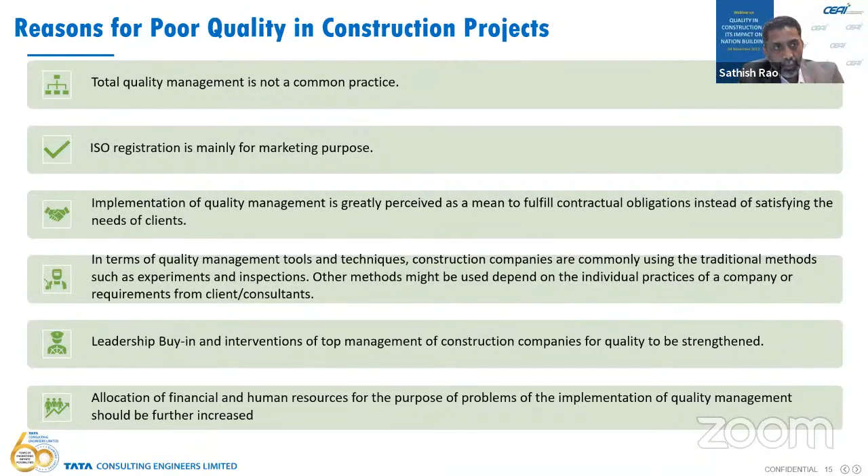We are still talking about quality management being done through traditional methods. We spoke about the digitalization and advanced technologies that have come in, but not all companies are investing in methods where the end deliverable is of the quality that is expected, stated, or desired. We are still not working on it, not investing enough. Leadership buy-in - yes, we should have more leadership interventions where they focus on and talk about quality. This is actually a top-driven thing, that's my personal opinion. And finally, allocation of due monies and human resources for quality management.

If you look at a systematic approach, what do we need? We need a good design, a consistent construction method, consistent and good quality material. We have to have satisfactory monitoring instructions. All these, with due feedback, ensure site operations are such that the end user is consistently satisfied, feeling that they're being delivered what they sought for. That's something we should be looking at.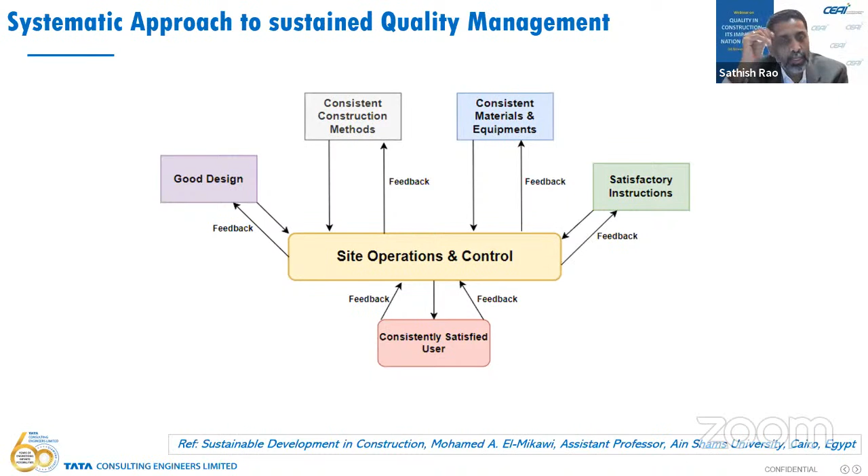The feedback mechanism has to be a continuous engagement process across everything as we look into better quality management. So the benefits: reduced time and cost, delivery of excellence, builds up reputation. L&T is what it is today because of consistent delivery, reduction in waste and time loss, and involvement of all parties - getting better and better ideas together with all empowered stakeholders.

Getting into the India context, let's see the global revenue growth that Moody's has rated. Construction companies are growing at an average of 5% - this is something big, $8 trillion by 2030. China, US, India are going to drive this, with India growing at 200% more against China. The construction sector in India is around 7.16% of our GDP, roughly 12.75 lakh crores. Given this size of construction, construction quality should have the importance to enthuse us to focus on this.

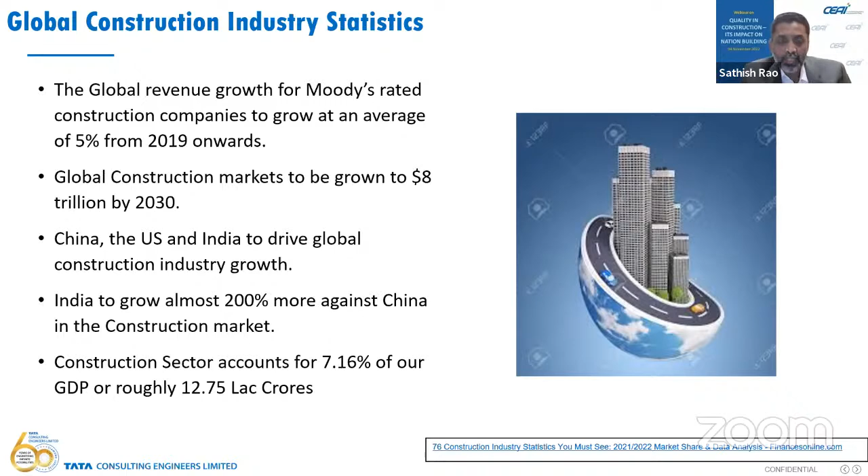Mr. Pandey was there. I think he told us that he joined NHAI in 2015, from where he has taken up the current position. This is a report that Mr. Nitin Gadkari had presented earlier.

He spoke about an annual loss of around $21.3 billion in India. Out of this $21.3 billion, roughly around 14.7 or $15 billion accounted for additional fuel consumption because of the poor quality of roads and the lower vehicle speeds and higher average stoppages.

Can you imagine? This is what I spoke about, the side effects of poor quality. We are not only talking about a loss of $21.3 billion, we are talking about an aside where, because of the poor quality of roads, we are spending more and more on additional fuel. This additional fuel cost is much more than what India owed Iran because of fuel subsidy, or what India spent or budgeted against agriculture, farmer welfare, rural development, and urban development. This is something that we are talking about.

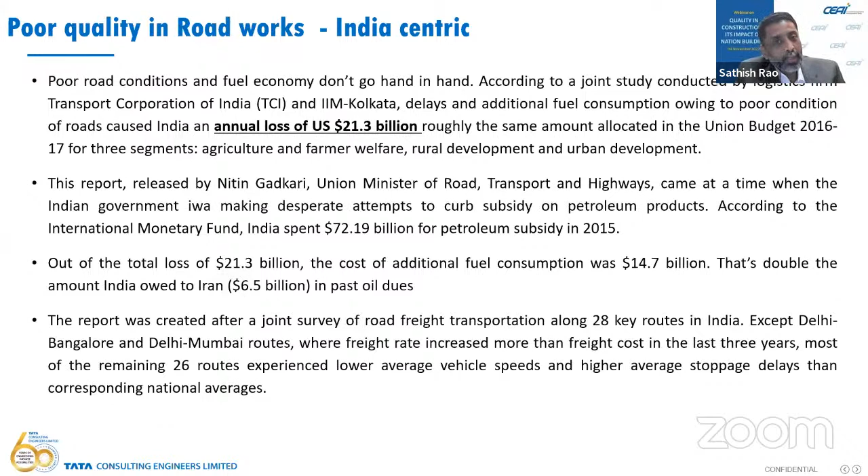This is poor quality, and this is a cost of poor quality which we are not able to immediately identify and focus on. As a group, where you have all contractors and consultants, we all should be together in trying to ensure that quality is delivered while we are talking about the monetary resources of a country.

So the major causes of rework that we're talking about: unskilled supervisor and labor skills, changes by the owner, environmental conditions, faults in the methodology, shortage of material, and the site drawing.

Why rework? Because, as I've already told you, 14 to 15% of the capex cost goes for rework. Even if you're talking about 12.5 lakh crores of rupees, and even at a conservative estimate of 10%, we are talking about 1.25 lakh crores of rework that is happening, which is of no use to anyone - no use for the contractor, no use for the client, no use for the consultant.

But this gives us a kind of insight that yes, we can look into training more and more of our people - the workmen, the supervisors - to ensure better quality, which would thereby support us in reducing the rework. So this is something that I would leave as an open thought for all the listeners, to see if this is worth their while, trying to see how they can invest more into training to reduce the cost on rework.

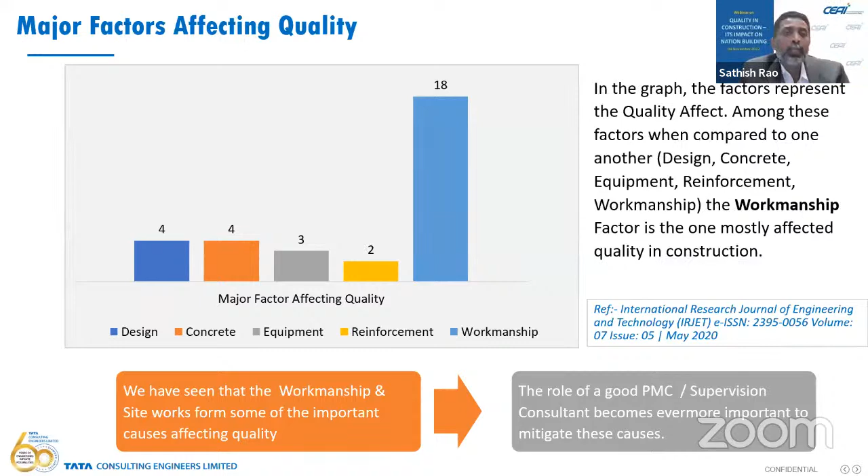Conclusion: we need to have a proper quality system, a quality plan, having proper standard operating procedures (SOPs), training both the design as well as the execution team, trying to give them more bandwidth to understand issues, to resolve issues, to understand the effect and the costs of failures. That's something which is very, very important that people do understand.

We should be looking into training the supervisors and the actual workmen to understand the definition of good quality, so that they start getting encouraged to deliver that. Audits and inspections have to be given due weightage for all the works that are being done.

We need to collect all analytics on the work we have already done, to understand what kind of preventive actions and measures can be done going ahead, and have continuous engagement with the customer, because both the contractor and consultant are working towards the client's end needs. We should have good engagement and connect with him to get feedback, so mid-course corrections can happen.

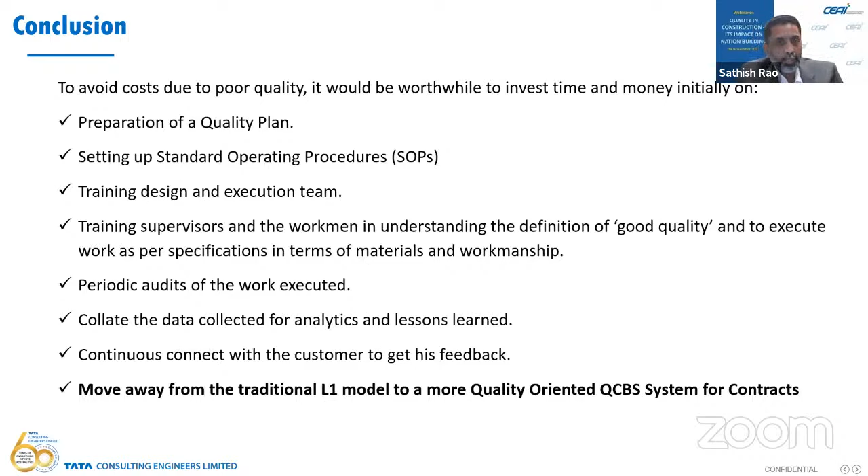Finally, we need to move away from the traditional L1 model in identifying consultants and contractors to a more quality-oriented QCBS, where we give more weightage to the systems, processes, and their quality management systems. With this, I would pause and hand off to Mr. Ghosh.

Thank you very much, Mr. Sathish Rao. We really liked your iceberg model. That's an eye-opener, how you visualize the poor quality. What you see at the top is just the tip of the iceberg. What is hidden is far more. And the cost of poor quality brought out by you is also very interesting.

Let me just tell you, CEAI has been working relentlessly to replace L1 with QCBS, and that is already being implemented in the GFR, and it's been rolled out ministry-wise. MORTH has already adopted it, and other ministries also need to adopt in due course once it's part of the GFR.

Yeah. Thank you very much, Mr. Rao. Thanks a lot.

I would now like to invite Mr. Alok Bhowmick to share his views. Mr. Bhowmick is the Vice President at CEAI and the Managing Director of his company's consulting firm, B&S Engineering Consultants. He is an eminent bridge engineer with exceptional records and achievements. He's a fellow of the National Academy of Engineering and represents India's most distinguished engineers, engineer scientists and technologists, covering the entire spectrum of engineering disciplines. He is also an international professional engineer of the Institution of Engineers, India.

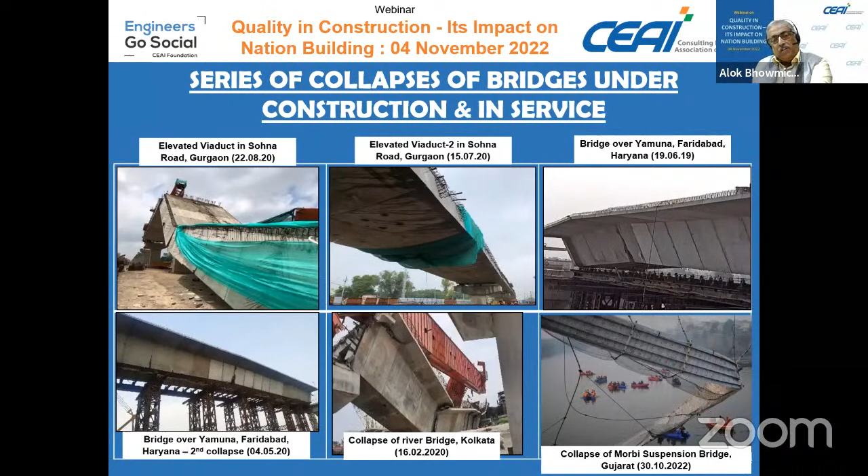For National Highway, Mr. R.K. Pandey mentioned about many things, and one of the good things that happened is a policy circular by the Ministry of Transport, dated October 2021, where the concerns of quality were very much emphasized. The role of the contractor, authority's engineer, independent engineer, NHAI officers, and ministry officers were all nicely put in this policy circular, along with checklists for roles and responsibilities of various stakeholders. But the real problem is in implementation of this policy circular. Despite this kind of nice policy circular, on ground, these are hardly implemented.

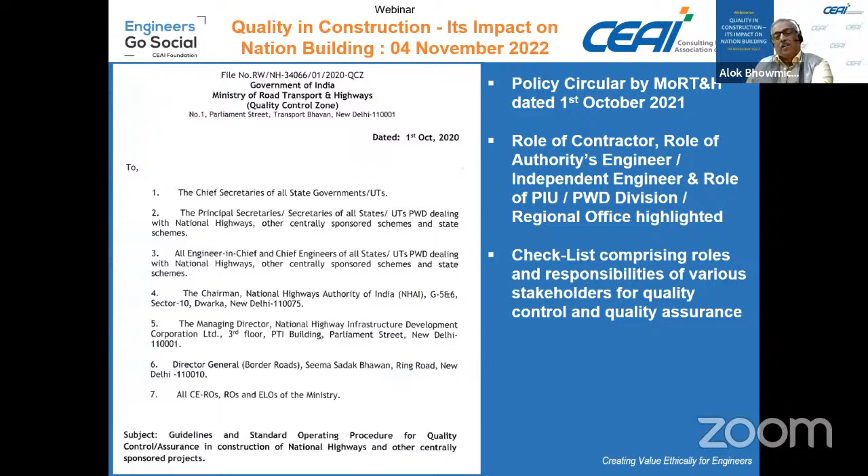We have also seen that whenever there is a structural failure, the complexities of reality are often oversimplified and distorted, often influenced by a spin from interested parties. Immediately after failure, you will hear that it was an act of God. For example, a couple of months back there was a failure in Bihar, and the immediate reaction from the contractor as well as the press was that it was due to a thunderstorm in Bhagalpur. Though there was no thunderstorm, and subsequently there was a press report by the Honorable Minister himself ridiculing the officer's reason for collapse. Such things often happen, and this diluting of serious concerns of failure, not only by the client but by society at large, is actually the root cause of the problems we are facing today.

I will not take many examples, but I want to add one more. This is a flyover which collapsed in Kolkata, I think in 2016, which killed some 27 people and injured more than 80. The first reaction of the contractor was that it was an act of God. Subsequently, it was found that the mishap occurred due to wrong design by an incompetent designer, poor construction by a shadow contractor. The actual contractor appointed for this job was an overseas contractor, but the real work was done by an Indian contractor who did not qualify for this kind of job. Also, very poor material was used on record, and there was a complete absence of proper supervision.

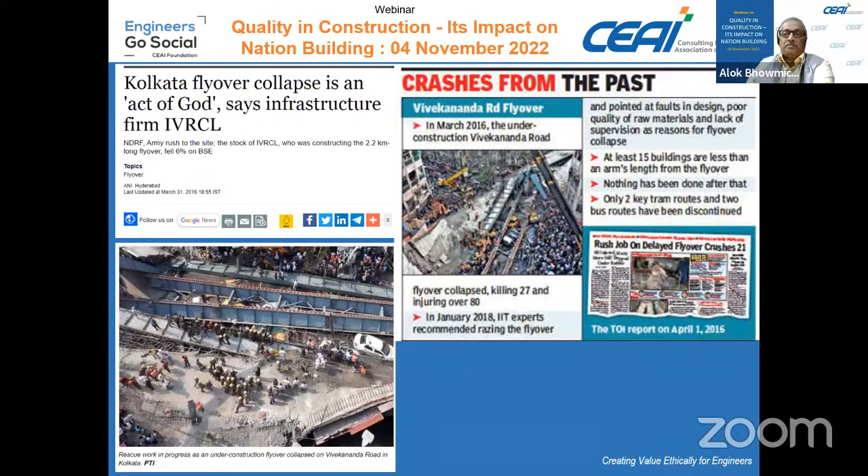So what are the various myths in quality assurance and quality control? Let me go one by one and explain.

First, many people think that quality assurance is a simple task involving testing of material and verification of workmanship at site. Quite often, the person made responsible for quality by the contracting firm or even the client—it's kind of a punishment posting, as if the person who is supposedly not good for construction should be sent to quality assurance.

In reality, it is just the opposite. Quality assurance is the most important task, which must start from the planning stage itself. With proper quality assurance in place, many important issues of concern can be addressed and identified during construction, and you can tweak with this.

In fact, there is a possibility, if you have good quality control, that you can optimize and save a huge amount by changing the standard deviation, by reducing the cement content in a mix. Because if you have a low standard deviation and better quality control, you can change your design mix to save material as well as cost for the contractor.

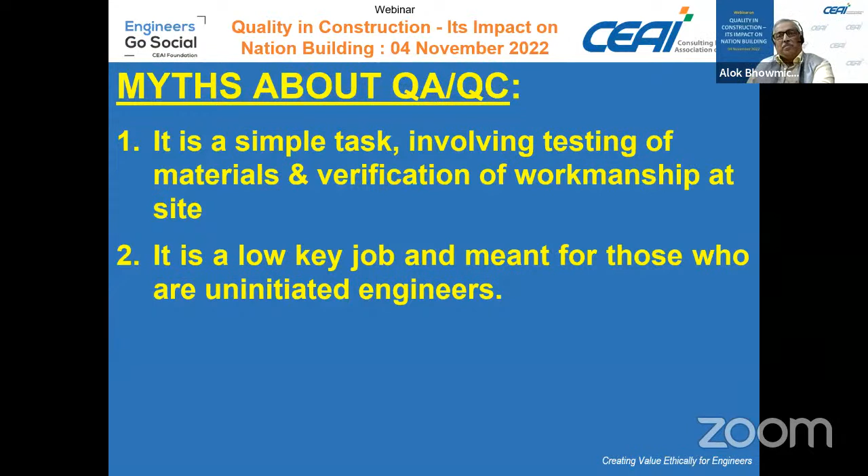As I mentioned, significant savings in production costs can be achieved if you have a good person at QA/QC. The third myth is that it's a job where one simply goes for a tick-box solution in a given checklist format.

I have worked in the past with many organizations that are ISO 9001 certified, where the audit reports are filled only when there is an external audit just a day before. Months and months of work will be ticked only on that day just to satisfy the auditor. And this shows the culture.

You see, just merely having a system in place will not work. You have to make sure that the system is actually being implemented in letter and spirit.

The fourth myth is that designers are not required to visit site to inspect whether the design intent is met or not. And this is a very serious issue. In most of today's EPC contracts or HAM contracts, the contractor has a designer who reports to the contractor.

There is also an authority's engineer engaged by the client, responsible for construction at site. In many projects I have seen, the designer never makes a visit to the site of works, and it is not in his scope of work, in his terms of reference.

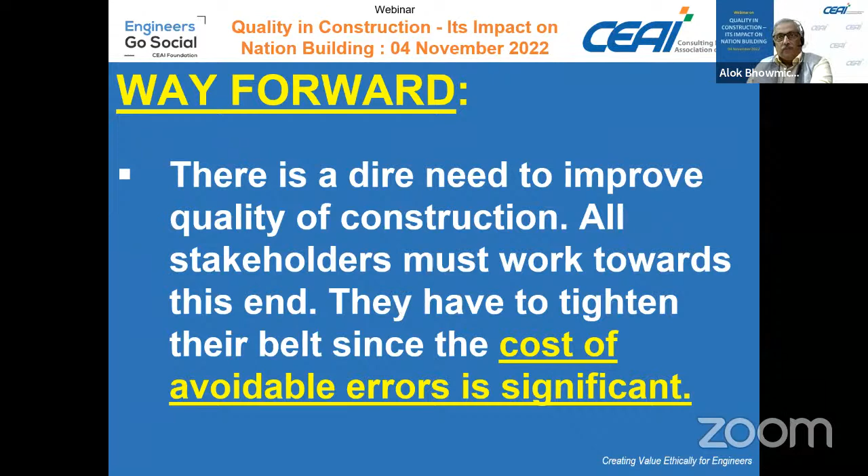Then there is unrecorded process waste, which is nothing but inefficiency of the agency involved, and that is also quite a substantive amount. And last, we have these latent defects. Many contractors and companies reserve some percentage, something like 3% on average or so, in their budget to correct errors that they know they will make.

So imagine in any project where the consultants are paid a fraction of not even 1%, it is only a fraction in terms of percentage of the construction cost. A whopping 20 to 30% of the cost is just lost because of these kinds of errors. Only if you add 1% in the fees of the consultant and make sure that a competent consultant is engaged, probably you can save a substantive amount of this construction, besides the brand image.

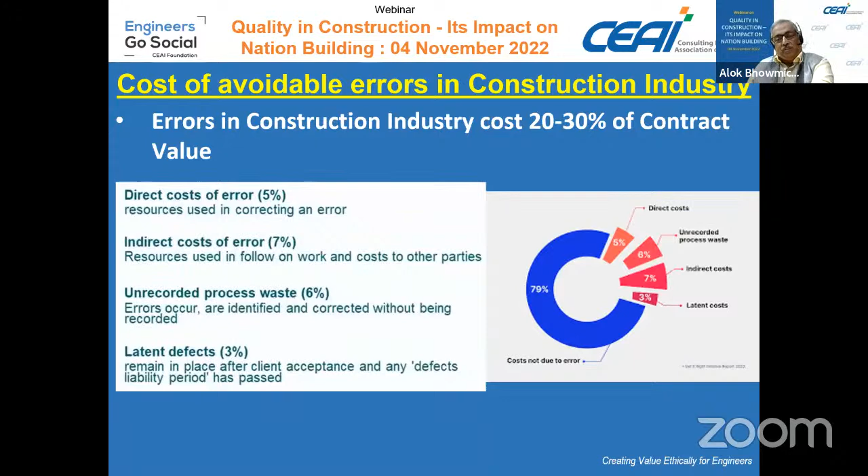So to conclude, I will say, for owners, clients, and authority engineers, a quality assurance system for construction should focus on the process as well as the end product, and should not be allowed to become a bureaucratic process of just ticking boxes. When appointing consultants, include the requirement to carry out sufficient periodic site inspections to satisfy the design intent.

For consultants and structural engineers, I think the contract agreement with the client shall specify the designated hold points for inspection and ensure that the relevant inspections are carried out by members of the design team.

The consultants must be aware of the risk of accepting a design-only commission that excludes site inspection, because tomorrow, if there is any problem, whatever may be the reason, then you will be dragged into it.

And once there is a failure, in an investigation it becomes very difficult to prove whether it is a design fault or a construction fault, and you keep justifying your position. But I have seen many failures where the design intent was not actually carried out, for example, take the case of a flyover failure in Kolkata, which overturned.

When the investigation took place, it had overturned after about 7 or 8 years of service. What they found is the bearings were interchanged during the construction itself by mistake. So the design intent was not fulfilled at site, and that proved to be fatal.

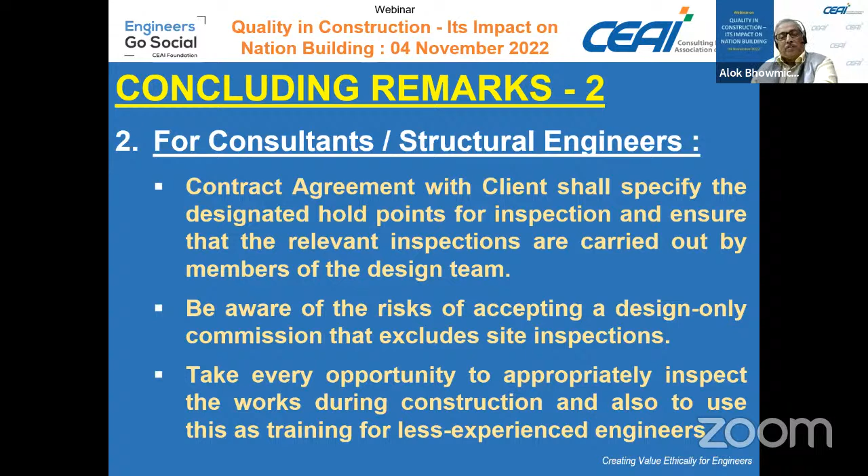So I will conclude by quoting Phil Stevens, who said that as for the future of quality management, I would like to think that the audit fraternity will come to realize that there is an enormous gap between the pedantic view of quality management and what happens successfully in practice. Thank you.